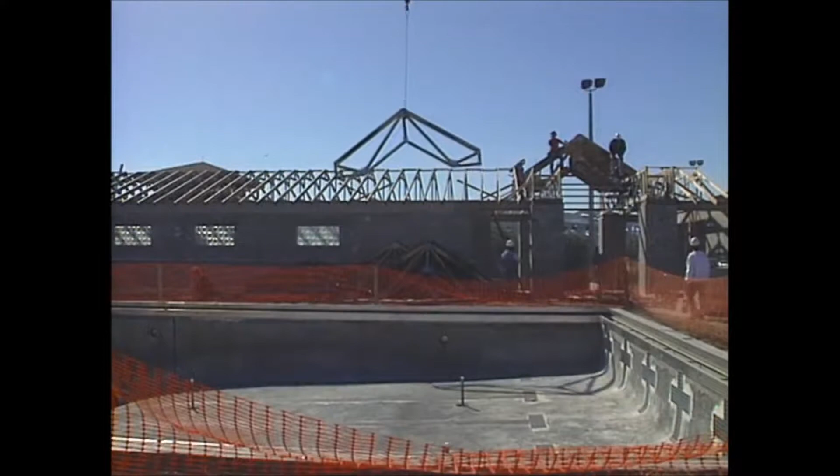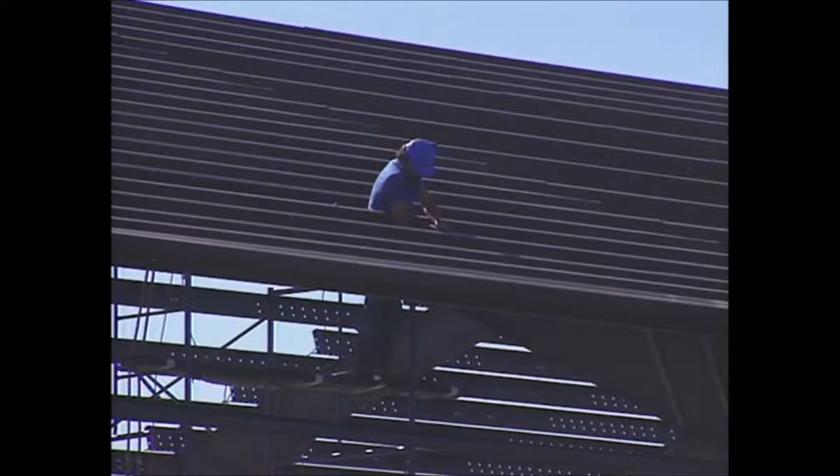Large construction projects and many government jobs depend on a competitive bidding process to get the best price and to ensure that the specifications are met. Contractors and vendors, working from the buyer's specifications, must be able to make fair and accurate cost estimates to increase the chance of winning bid awards.

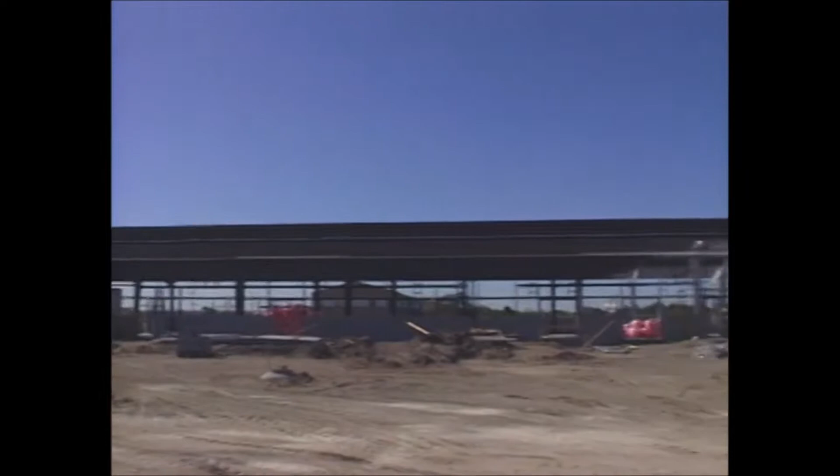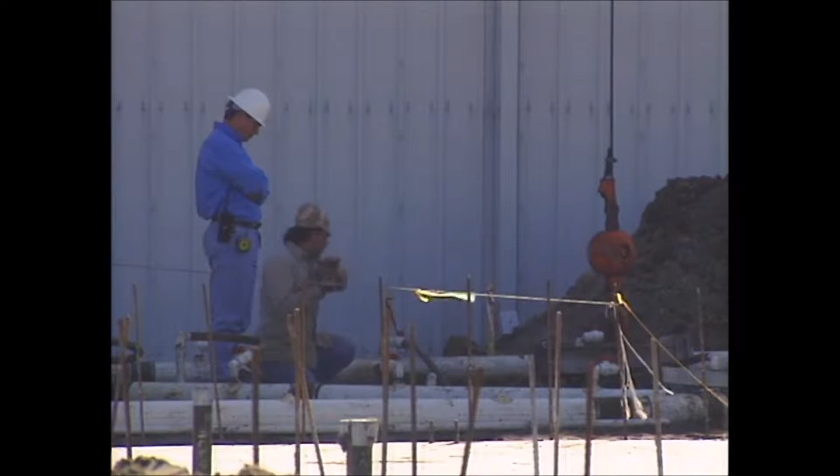And after being awarded a contract, they must be able to meet the specifications and the deadlines and make a fair profit. It's a simple concept, but to be a successful bidder, you must know how to get low and how to make money. Competition is tough and getting tougher. You have to know how to do your homework. In this program, we will examine how successful low bidders got low and made money. We will look at the techniques for cost estimating, learn some bidding strategies, and see the benefits of cost engineering.

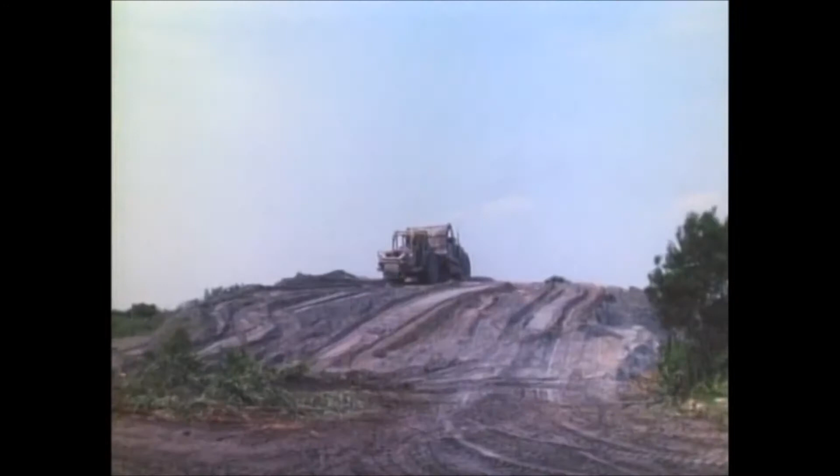Are you getting your share of contracts? Do you often miss out by just a small margin? Do you really know how to be a successful bidder? And when you do win a contract, are you certain that you can control your costs and make money on the project? Are you willing to just gamble on having good luck? Listen to what Joseph A. Brown has to say.

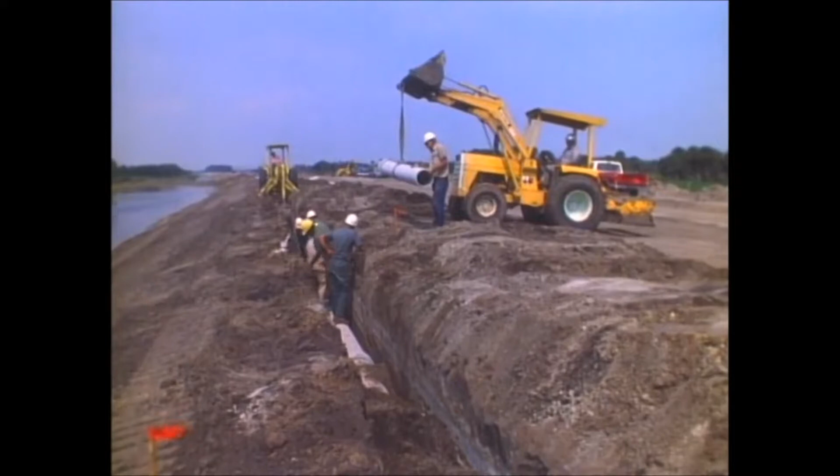Hi, I'm Cindy Moran, and this is Joe Brown, a professional construction cost consultant with over 35 years' experience in estimating or reviewing government and private construction jobs, totaling nearly $10 billion. Joe, you've been in this business a long time. Does construction cost estimating and bidding have to be a gamble?

Well, it certainly can be a gamble. In fact, soon after I graduated from the University of Florida, my boss came to me and we were talking, and he said, you know, construction is the biggest legalized gambling racket in the country. And I was startled and taken aback, and I said, well, what about the stock market? And then we thought a bit, and you can lose your shirt in the stock market in the same way you can lose your shirt in construction and bidding.

And it's important in the stock market that you study the market and learn. In the same way with construction, you need to learn the tricks of the trade in construction, the tricks in estimating and in bidding construction. And that's what we're here to talk about today. You mean to tell me that there are actually tricks for winning bids and making money? Absolutely, but not really tricks, but tried and proven techniques.

In fact, over the years at Kennedy Space Center, when we were doing jobs from $5,000 up to $1 million or multi-million dollars, I thought that many of the bidders bid the job too low. And then I looked at some of the other bids, and they were too high. And some of them were really just right, especially when I knew they were right in line with the government estimate.

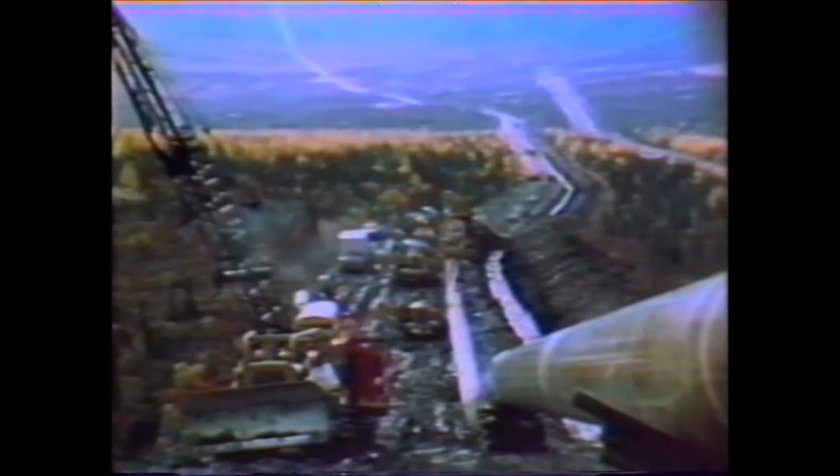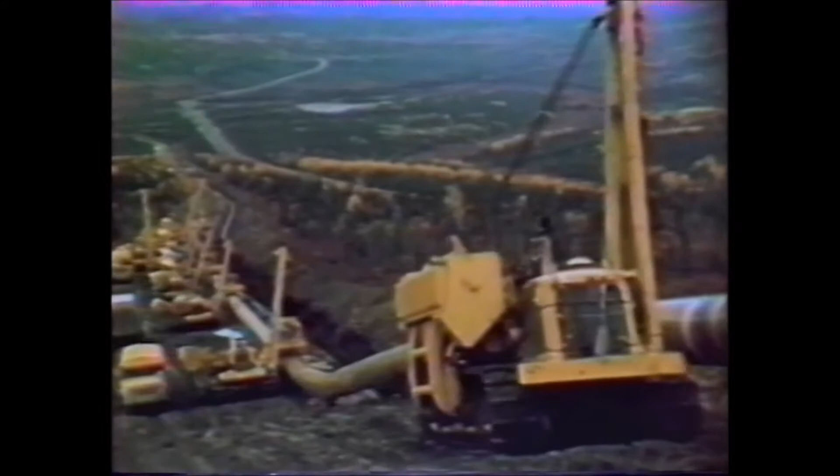Sure, there are several high-profile jobs that come to mind, some that you may have heard about in the news. We've all heard about the Alaska Pipeline. That was an enormous job, 800 miles of 48-inch pipe, through fragile terrain and heavy permafrost. The estimator had 3 requirements when he made the estimate many years ago. He had a world globe, he had a piece of string, and the requirement of the 48-inch size pipe.

His budget estimate for that was $900 million. Cindy, can you guess what the actual cost of this project was? I have no idea. $1 billion? No, actually, it was closer to $9 billion. Wow. That was the 10 times item we were talking about earlier. In another famous project, the Channel Tunnel, or the Chunnel as it has been called, was budgeted at $5 to $8 billion.

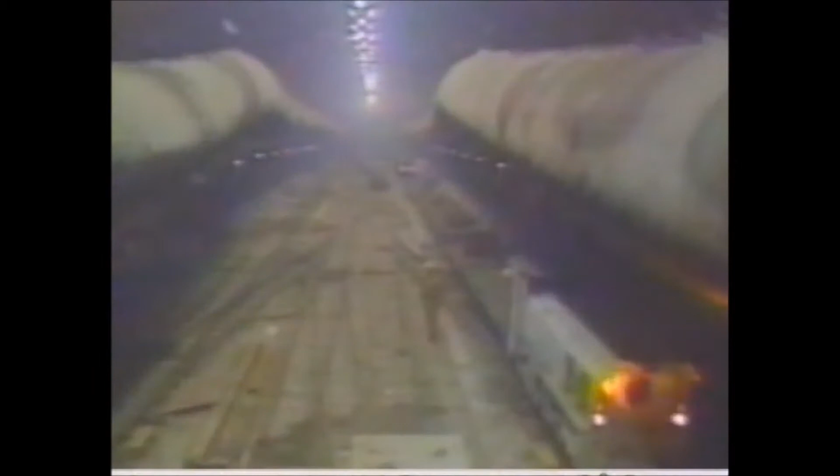Last I heard, and we're still working on the final figure, but it's going to be near $20 billion. Also, a couple of international airports are examples of how badly things can go wrong and get out of hand. A friend of mine jokingly called these Murphy's International Airport Number 1 and Murphy's International Airport Number 2, after Murphy's Law, that if anything can go wrong, it will.

In one, the original budget was $110 million, but they wound up paying near $310 million. The other one was even worse. They expected to pay $1.5 billion, but had to come up with near $5 billion. Of course, these were extreme examples. They were cost-plus projects, and they were change order jobs, so the contractor still made out okay.

But more important now is concentrating on good, accurate cost estimating, bidding, and construction. To help other bidders, we need to look at how the successful low bidders have gotten low and made money. We need to look at techniques for cost estimating, some of the strategies for bidding, and techniques for cost engineering. It will help to know how government estimating, as used at Kennedy Space Center, has been more accurate. If bidders understand the techniques we use in cost estimating, they can profit by applying this knowledge to their own work. What can you share with us?

Well, several years ago, around 1967, I guess, I began to analyze the process of cost estimating, of bidding, and profit. I tried to figure out how the bidders were succeeding in winning bids and making dollars. There are a lot of stories out there, and we've discovered a lot of good techniques. Joe, are these techniques that anyone can use in any type of construction? Yes, anywhere, anytime. I've come up with over 80 ways and 15 basic keys that can be used to become a more successful bidder and make money.

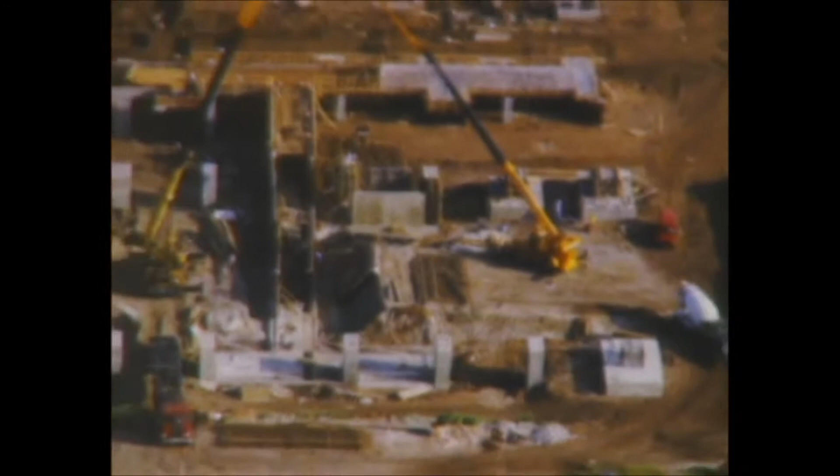Beyond that, I've developed a highly sophisticated method of calculating in advance of bidding what a job should cost. Then, when the bids come in, I'll know whether they're in the right ballpark or not. For example, we used this process for advertising for bids for the Space Station Processing Facility in 1991. Most Kennedy Space Center projects are not only highly complex, but they simply have no precedent. They are things that have never been built before.

Well, on the Space Station Processing Facility, the successful low bidder was only 1.2% below the estimate we did in advance. And this on a job totaling almost $57 million. Now that's really accurate. Bidders can also use this knowledge. The same 15 keys we use to get low and make money.

Those are interesting stories, Joe, but what are the main principles that bidders have to follow? What are the big ideas, you might say, that come from this? Well, Cindy, that's why we're here today. Now let's take a look at the 15 basic keys. The secrets for success in bidding and for making money on a job lie in several basic principles. I like to call them the keys to success. Some may seem more obvious, some are easy to overlook, but they're all very important, and here they are.

Ingenuity, which means resourcefulness and inventiveness. Using your head. Imagineering, combining imagination with engineering, and being able to see beyond merely adding up of the numbers. Efficient management. You have to carefully and efficiently manage every aspect of bidding and construction. Creativity. Call this intellectual inventiveness, putting known ideas together to get new ideas.

The next story comes from the construction of a parochial school also located in Jacksonville. The low bidder got low and made money on this project in 5 major ways. By using novel construction methods, by analyzing quotes from vendors and subs in order to get the best prices, by keeping job office overhead low and payroll taxes and insurance rates low, which was possible because of a good safety record, by accepting a low profit margin because it was for a church, and by limiting competition through the use of specialized design and construction techniques and bidding strategy.

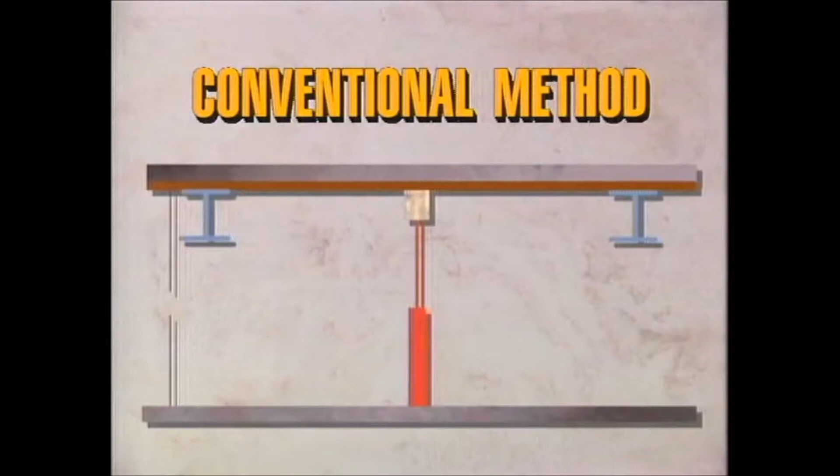This job illustrates how important ingenuity can be in getting low and making money. The contractor's low bid was based on a novel idea, a reusable blocking and bracing system. Conventional methods would have required the use of steel shoring to support the second floor while it was being formed, poured, and cured. This would have cluttered the first floor slab area to the point that further work on the first floor would have been almost impossible until the concrete had cured and the shores were removed. In addition, the steel shores would have to be rented.

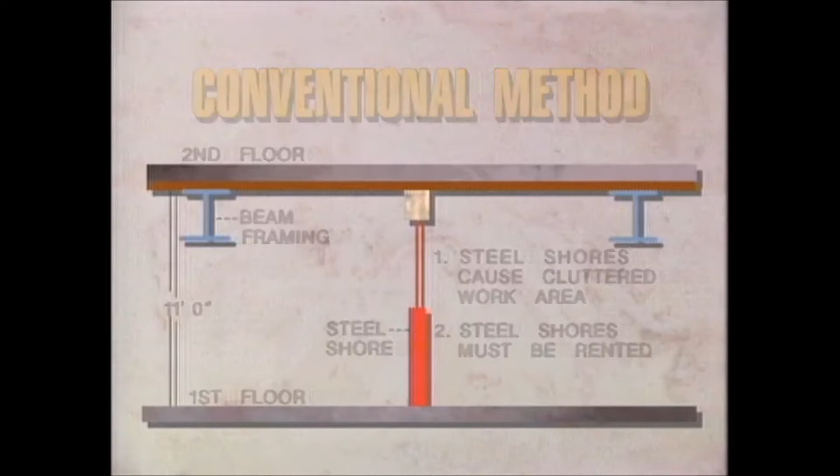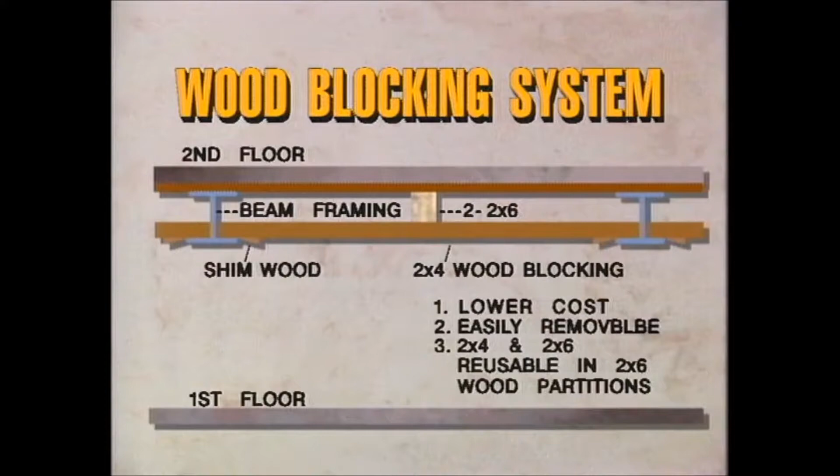Instead of locking himself into traditional methods, the contractor developed a unique blocking and bracing system using 2x4 and 2x6 dimension lumber placed temporarily on the lower flanges of the steel beam framing and aligned with wood shims. This eliminated the cost of renting steel shores and kept the first floor area clear so that work could move ahead while the second floor slab was being poured and cured. Following the cure, the 2x4s and 2x6s were removed intact and used in the wood partitions for the building. This resulted in substantial savings on materials.

Further cost economies were achieved by closely analyzing the window wall sub-bid and breaking it into several smaller bids for glass, for panels, for caulking, and for solar screens. The contractor got the best prices and avoided the usual subcontractor's markup by purchasing directly from the various suppliers.

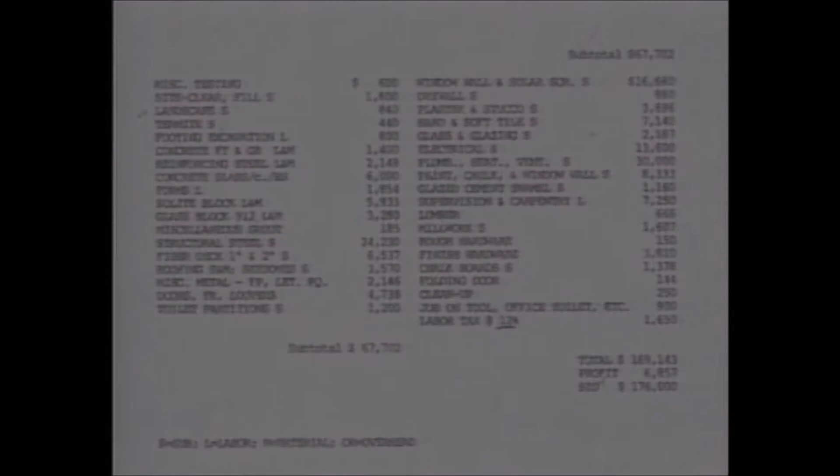While the calculated profit was fairly small for a job of this size, the work was important because it not only kept the company active, but it also helped establish a reputation for economical, imaginative work. The detailed cost estimate summary shows the costs for subcontracts, labor, materials, and overhead, together with the final figures showing the total cost, the profit, and the bid.

Sometimes, of course, things just don't work out, but there is always something to be learned. Here's a story about how a lot of work went into figuring a bid and how the bidder got low. Unfortunately, the contract was not awarded due to a lack of funds. The story is interesting, however, because it shows that there is usually a lot more than one way to get low.

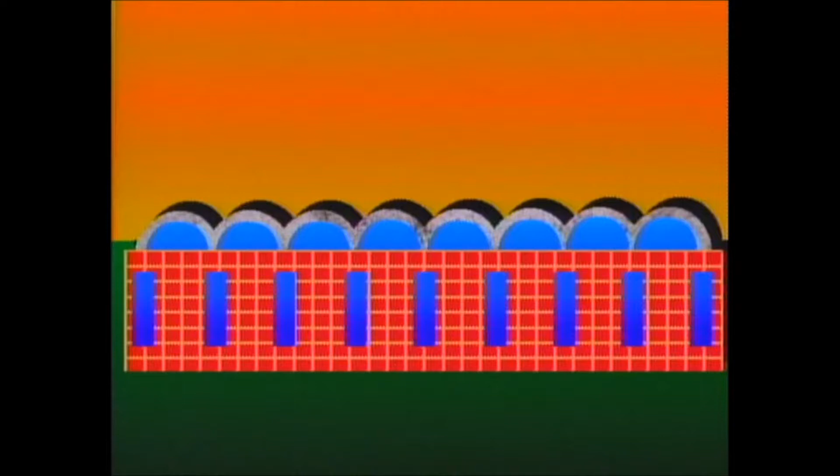This job called for a new design for a concrete vaulted roof for a church building. The design required 8 arches, each 70 feet long. In the attempt to get low, the bidder figured the job 4 ways. One method was to cast the arches on site in a sand mortar mix and then lift them into place with a crane. The second method called for casting the arches in place using reusable wood forms. A forklift would be used to lift and move the forms into position for the next pour.

The third method would also have the arches cast in place, but use reusable tin and wood forms. Again, a forklift would be used to lift and move the forms. The fourth method, and it turned out to be the cheapest, was to subcontract the arches to a company specializing in casting pre-stressed concrete shapes at their plant. The finished arches would then be trucked to the construction site and hoisted into place.

Figuring the cost of each of these 4 ways took a lot of work, but it was a necessary step in being the low bidder. Would precasting always be cheapest? Not necessarily. Every job has to be figured from every angle to get low and make money. Now, the next story shows the disadvantages of purchasing from a sole source, and also shows the importance of effective cost control once a job has started.

This job involved building a girls' high school in Orlando. The low bidder on this $200,000 job won because of being able to get the lowest sub-bid on the electrical work and limited competition. Some close figuring and cooperation was needed. A major contract requirement in this job called for leaving a number of trees in place. Careful analysis of this and other environmental concerns resulted in being able to meet the contract requirements and still maintain profitability.

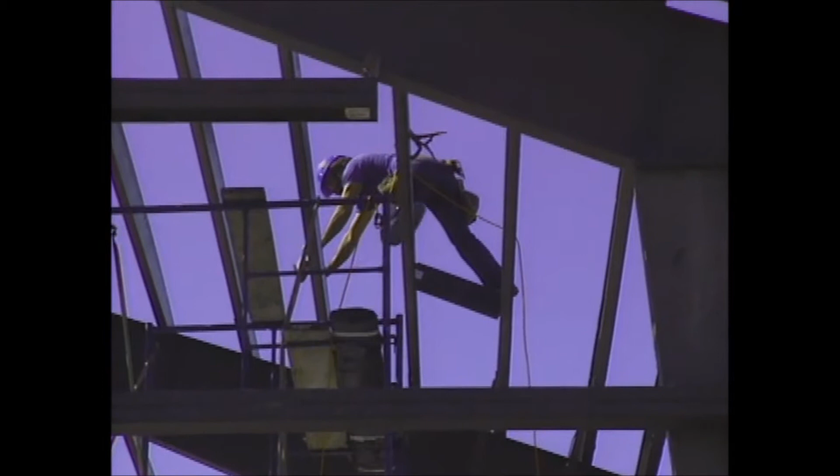But shortly after work got underway, the problem started. A particular brand of steel floor and roof decking was specified in the contract, making it a sole source item that would cost over $20,000. But a strike at the decking factory was causing delivery delays and was holding up construction. The general contractor on this basis justified to the buyer that a different source was needed for the decking in order to keep the job moving. A decking product of equal quality was located. The alternate was less expensive by far, a savings of $4,700, proving that sole source procurement can be very costly.

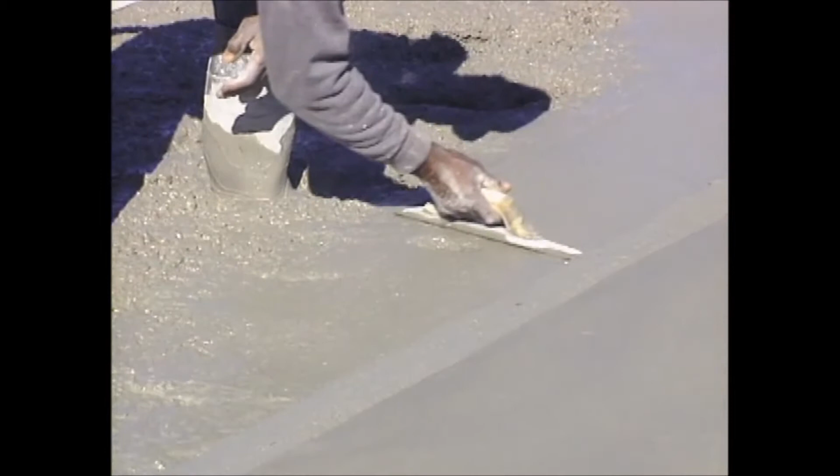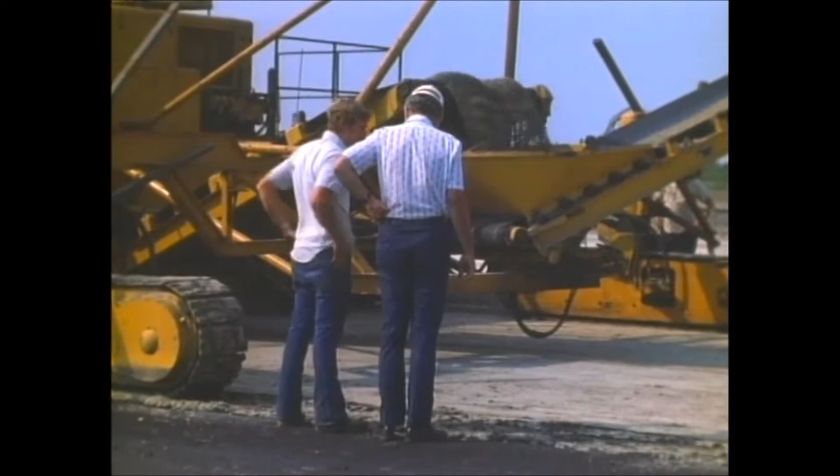This job also proved once again the need for tight and effective cost control procedures. As the job progressed, the general contractor learned that the concrete supplier was billing for more concrete than was actually being delivered. If through good cost control procedures the general contractor had not discovered this, much of the profit margin would have been lost. The job continued to be a management challenge. Labor called a strike due to certain perceived grievances, and as luck would have it, the contracting boss was away to Europe on vacation, leaving Joe Brown in charge. A team effort led by Joe averted the strike problem and kept the job moving to the benefit of everyone. Good teamwork always pays.

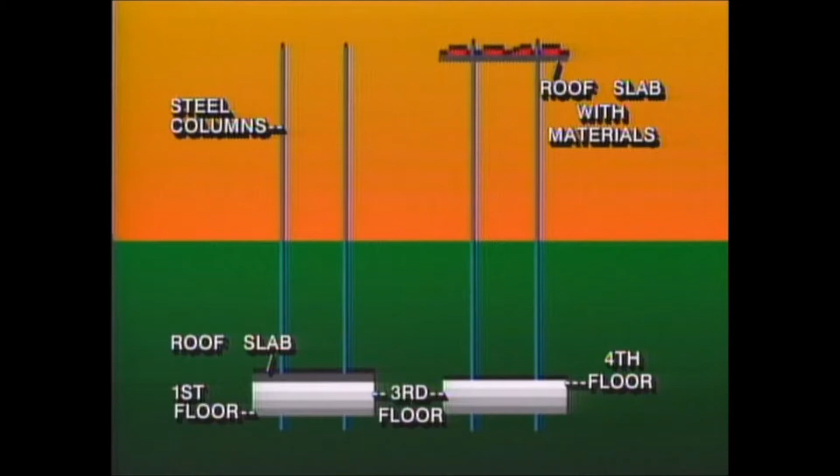To find out about our next story, we visited with a friend of Joe Brown's who happens to be a construction superintendent. Jim, Joe said that you knew about a very clever idea used to build dormitories at a Florida university. Yes, there is an interesting story with this, and a bit of ingenious work too. As you know, the lift slab method has been used for years. In the lift slab method, steel columns are erected to form the backbone of the building. Then the floor and roof slabs are cast at ground level. After the concrete is cured, the slabs are lifted into place with jacks. Saves a lot of time and labor, and it's usually safer.

In the dormitory job, we went a step further, and it made a big difference. We precast the slabs in the usual way, but before we jacked them into place, we marked each one to show where everything would go. Walls, plumbing fixtures, everything. Then we loaded them up before they went up. We would load roofing materials, masonry like bricks, tile, walls, partitions, plumbing fixtures, toilet fixtures, anything that was going to be used on the slab, we put on that slab.

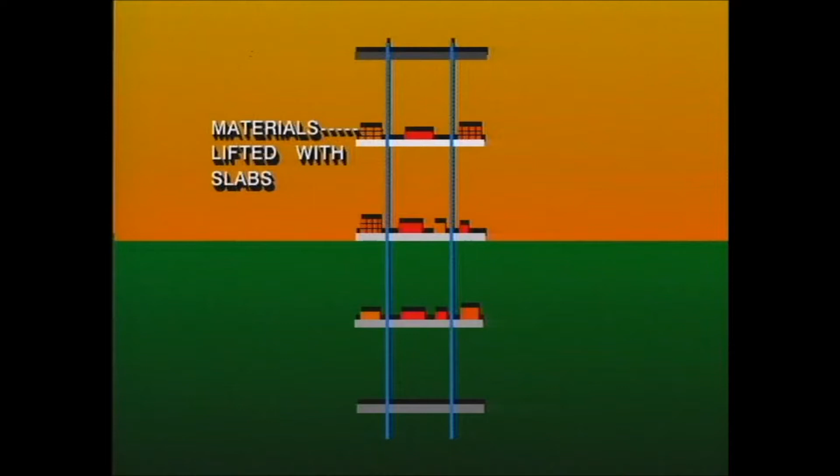Then we used special jacks to lift them up into place, starting with the roof, then the top floor, on down to the first. We really saved a bundle in time and labor that way, getting the materials up where they would go without extra handling. It's a pretty good example of imaginative engineering and creativity, and a plus for the lift slab method. There's always a better or cheaper or faster or safer way to do a job. You just got to use your head.

Thanks, Jim, for that insightful story, and we're going to catch up with you a bit later on. Thank you. All right, let's see over here.

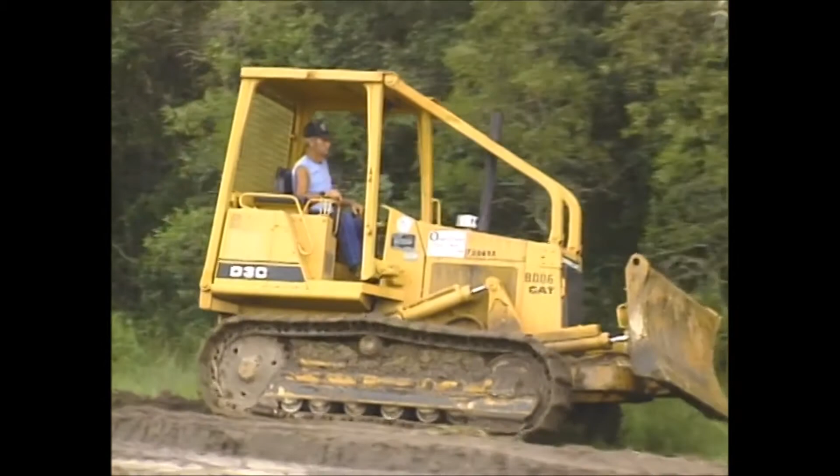Sometimes the benefits of ingenuity and creativity can come from merely not overlooking the obvious. It's easy to fall into the trap of doing something a certain way simply because it has always been done that way. Take the case of a stretch of Interstate Highway 4 being built through Orlando some years ago. When the bids for earth moving for this section of the roadway were opened, one out-of-state contractor was about a third lower than anyone else, and he got the contract.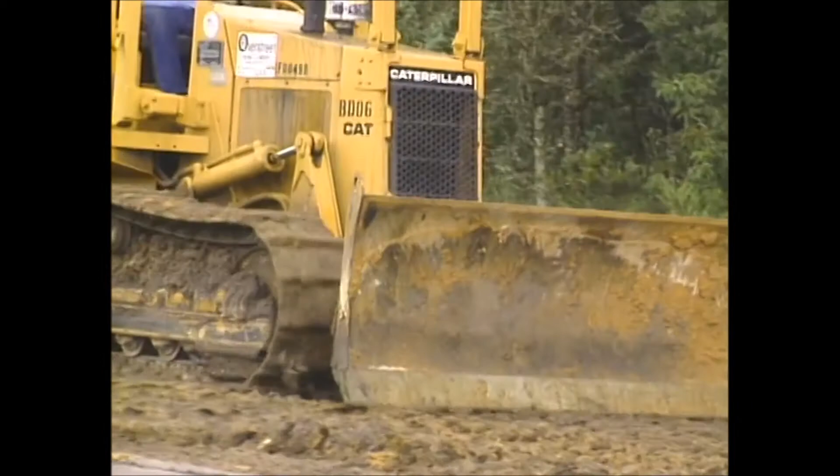The other bids were quite close to each other, so the local bidders were saying, "He can't do it for that bid," and sat back to watch him lose money. But they all figured on doing the job in the conventional way, hauling thousands of yards of fill dirt from a borrow pit several miles north of Orlando. What they didn't know was that the low bidder had a better idea, and it was right under their noses, or their boats in this case.

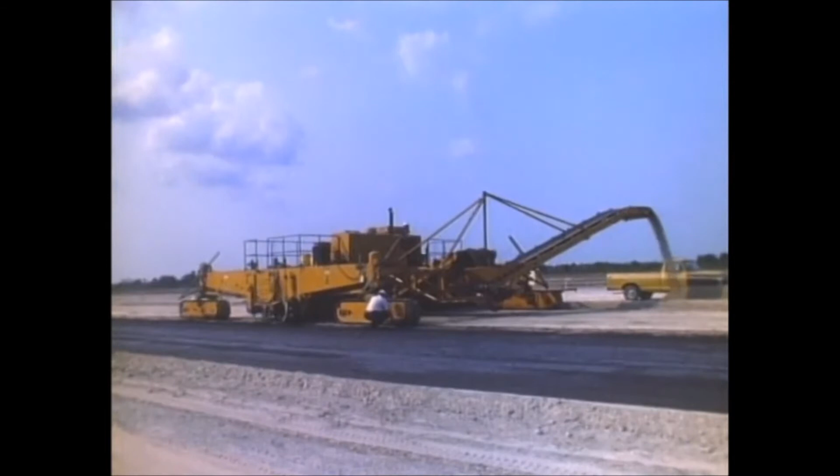The low bidder had quietly obtained an option from the owners of a nearby lake to dredge fill from the lake if he got the contract. Then after the contract was awarded, he used dredges to scoop out the bottom of the lake and trucked the fill the short distance to the construction site, thus saving considerable money and time that would otherwise have gone into excavation and hauling from the remote borrow pits. There was a fringe benefit, too. The lake owners were very happy with their new, deeper lake.

This was, of course, before the increase in environmental concerns and environmental permitting, so it probably could not be done again, but it's a good example of using imagination and ingenuity, and not overlooking obvious ways to sharpen your bidding and make money.

For the next set of stories, we'll go to some of the construction jobs that had to be built to make the United States a leader in space. Kennedy Space Center has been the scene of some of the largest and most complex construction projects ever attempted. The first story comes from Launch Complex 17 at Cape Kennedy. Two new umbilical towers were needed at Launch Complex 17.

The government estimate on this job was $275,223. As was typical in those days, there was a wide range between the highest bid and the lowest bid. In fact, the high bid was almost twice the low bid. The methods which the various bidders planned to use were probably the reason for the unusually wide bid range. Therefore, the construction method selected by the contractor probably was most responsible for him being the successful low bidder.

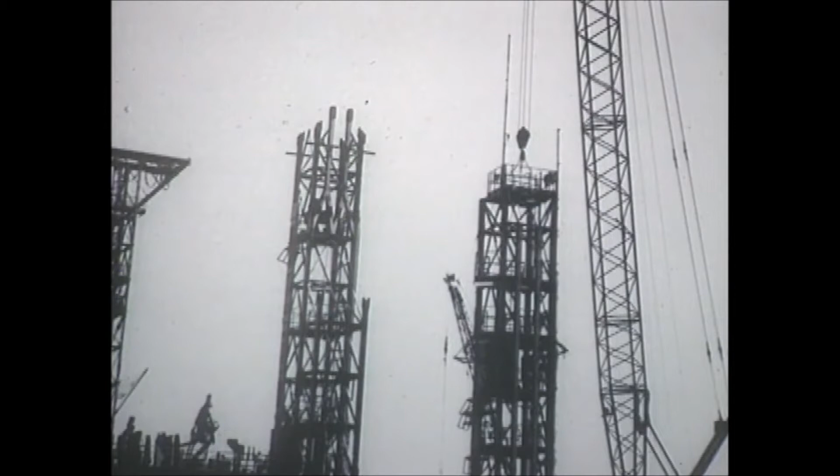Instead of constructing the towers on site, the contractor prefabbed them in sections and transported them to the site where they were assembled. This saved considerably on both time and money. Another factor in this story illustrates the importance of good labor productivity and cooperation. The first tower was erected by the contractor's open shop ironworkers. In the interest of fairness, the contractor then engaged closed shop ironworkers to erect the second structure.

The labor cost for the second tower turned out to be competitive with that for the first tower because the closed shop ironworkers wanted to prove, and indeed they did prove, that they could be as successful and as productive as open shop ironworkers.

Sometimes getting low and making money requires something other than a good knowledge of construction and a sharp pencil. Here's a story that caused quite a stir early in the Moonshot program. The service structure at Launch Complex 34 had to be altered or modified for the Saturn 1B program. The low bid, a bid over $3.5 million, was almost $1 million under the highest bid of over $4.5 million.

According to the story, the general contractor's attorneys proved to the state of Florida that the mobile service structure was a moving vehicle with its own wheels and track, which it was. So they got a motor vehicle license tag for it and a sales tax exemption number, thus saving the 3% sales tax.

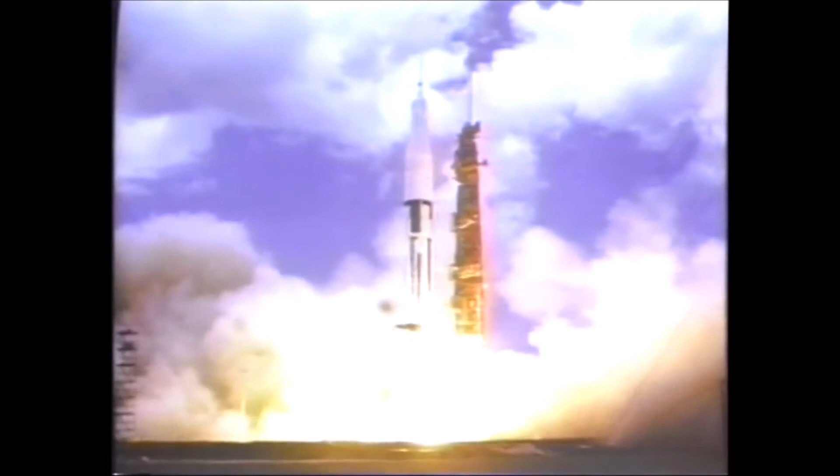It turned out to be a very clever move because the difference between the low bid and the next lowest bid was only $11,667, a difference of less than 0.5%. This was clearly one for the lawyers. It was also an example of the benefits to the bidder of limited competition.

This next story is about another mobile service structure, the big one at Launch Complex 39, which was used for the 363-foot-tall Saturn V moon rockets. Once again, there was a very wide range between the successful low bid and the highest bid, and almost $1 million between the low bid and the second lowest bid. But note also how close the successful low bid was to the government estimate.

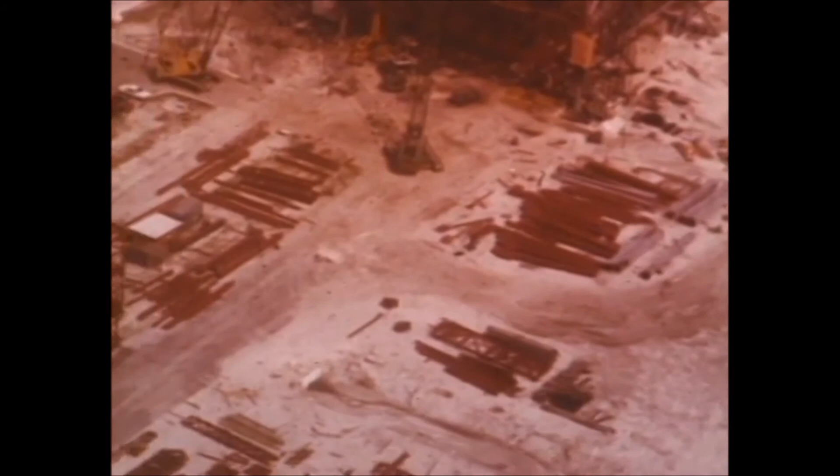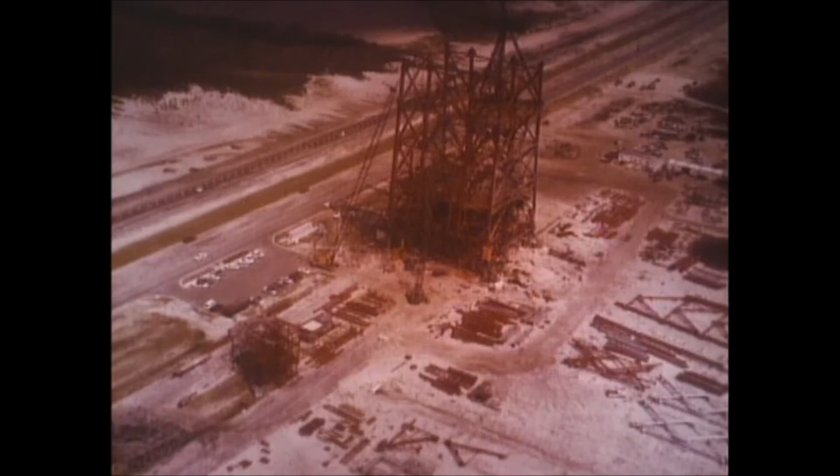The low bidder used a combination of ways to get low and make money. The methods used were again extremely important. Rather than attempting to build a huge structure on site, the contractor prefabbed large sections and shipped them to Kennedy Space Center on barges, where the welded sections were assembled. This technique added to the contractor's profit margin and saved time. This was also a good example of value engineering, often referred to as VE.

Value engineering is defined as an organized effort directed toward analyzing the function of systems, equipment, facilities, and supplies for the purpose of achieving the required function at the lowest overall cost, consistent with the requirements for performance, including reliability, maintainability, delivery, and human factors.

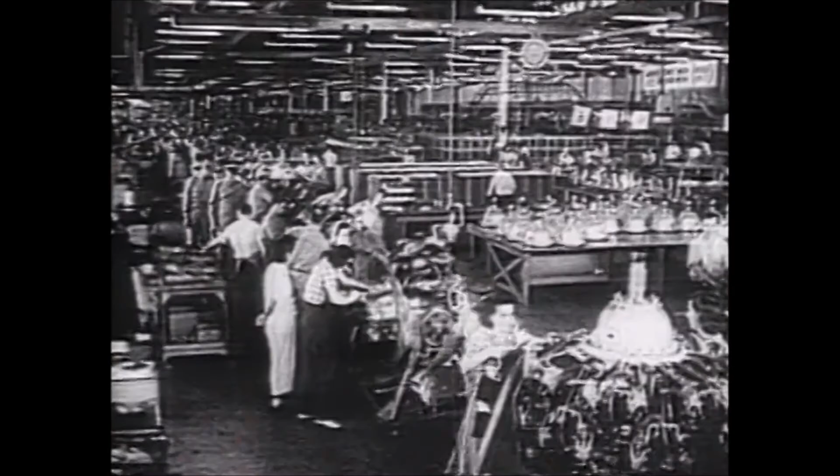The value engineering concept goes back to World War II, when critical materials were hard to get. Manufacturers were forced to use substitute materials but needed to produce products which met the performance specifications. Since then, the basic philosophy has become much more sophisticated and more useful. But it's not something that can be added on. Value engineering must begin in the earliest stages of design and be carried forward throughout the design and construction phases.

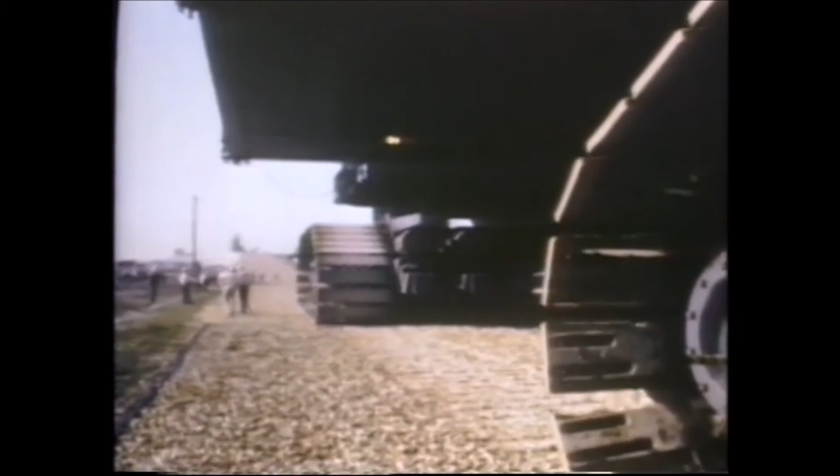Value engineering in this project involved many complex elements. In addition to prefabbing the sections and barging them to the site for erection, the contractor's studies showed that welding the structure would not only add to the profit margin, but would also save NASA a considerable amount of dead weight load, which was very important to the use of the crawler transporter. The combined weight of the huge Saturn V rocket and its mobile service structure was over 12.5 million pounds.

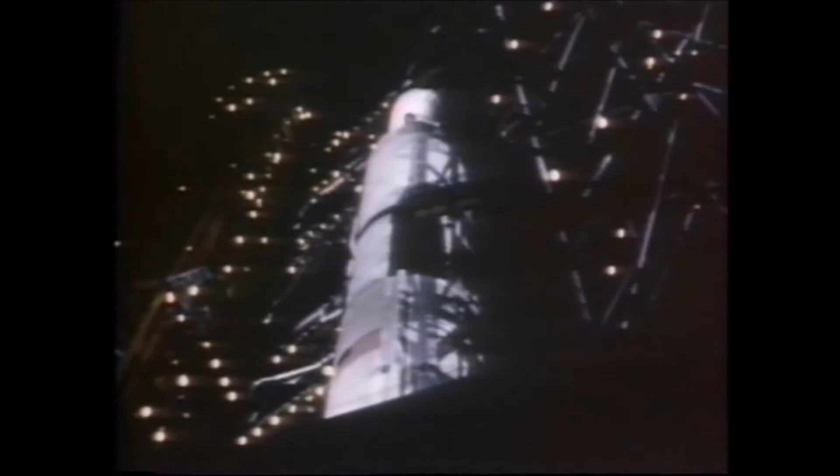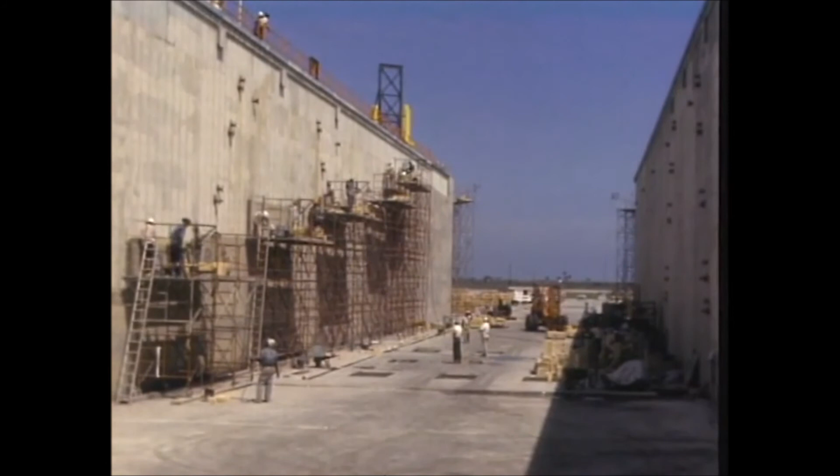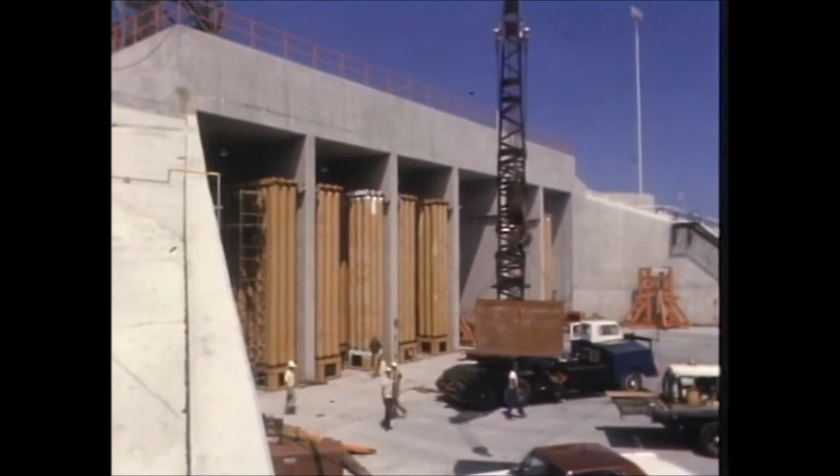The construction of the buildings and service structures and other facilities that ultimately led to the moon landing and other bold United States achievements in space was often overshadowed by the excitement of the rocket launches and the startling pictures coming back from space. But these buildings and facilities were and are essential to the space program. It's no secret the space program has been very costly, but quiet behind-the-scenes work by a lot of dedicated people has saved millions of dollars of taxpayers' money over the years.

Labor is always a big cost factor in any job, as our next story illustrates. After the vehicle assembly building was completed, it had to be outfitted and equipped for the special work and heavy lifting required to assemble the Saturn rockets. This included equipping the cavernous high bays.

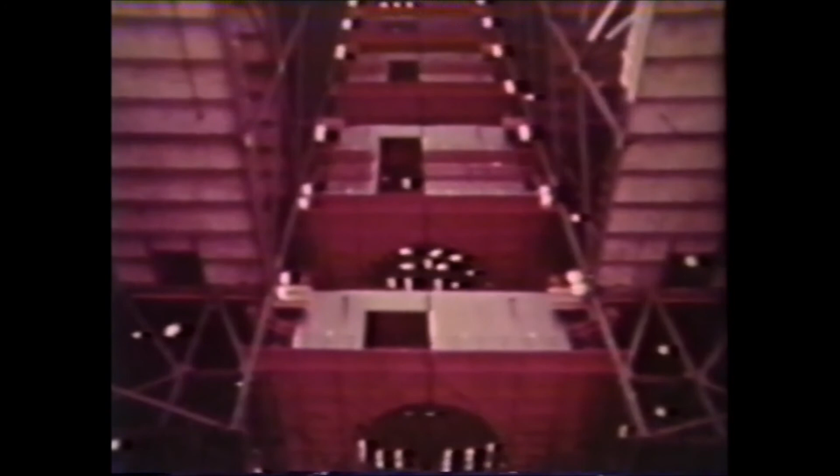In bidding to outfit High Bay No. 2, the successful bidder came in about $250,000 under the government estimate for the job and more than $2 million under the highest bidder. This was possible because the low bidder was an open shop contractor and the competition was not. Also, the low bidder prefabricated and assembled the 10 extensible platforms. They were weighed at ground level, then lifted into place with the overhead crane.

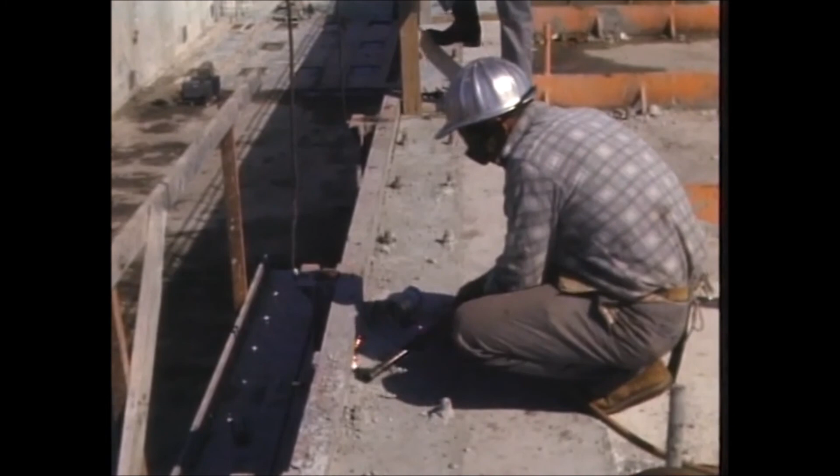Florida is one of 20 right-to-work states. People in these states are entitled to work, whether they are members of a closed shop or not. According to studies, open shop construction usually saves about 30% of labor costs compared to closed shop construction, and construction time is reduced by about 15%.

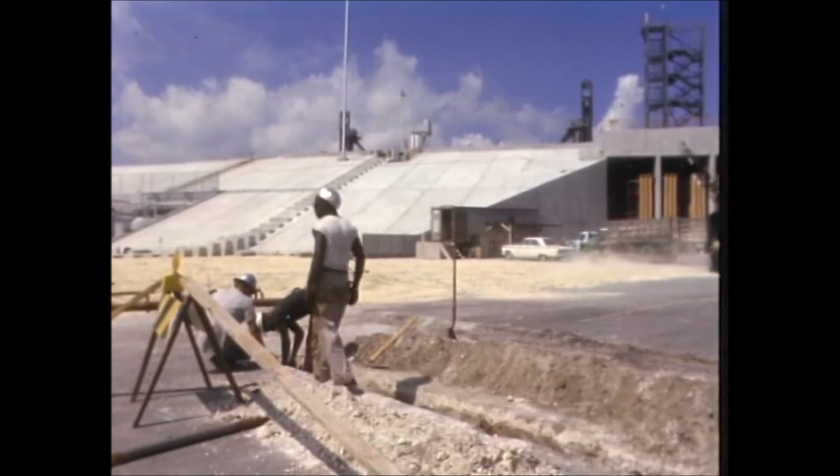Our purpose here, of course, is not to endorse or recommend open shop over closed shop. We all know closed shops can be highly beneficial to workers and employers alike. But the fact remains that being a successful bidder can easily hinge on labor costs alone. To be successful, you must be able to estimate labor costs, including payroll taxes and insurance, very accurately. And once the job is underway, you have to manage and control labor costs.